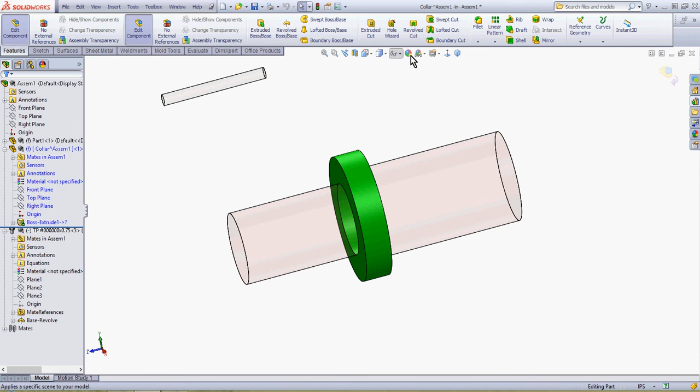I now need to create a new plane in the center of my collar. I'll right click on the collar, choose to edit the part. From the features ribbon bar, I'll choose reference geometry plane, select one face of the collar, choose the mid plane option, and select the opposite face of the collar.

I can now return to the assembly, and mate my new plane to an existing plane within the pin.

I now have my pin locked on center, but need to set its height. I'll add a third and final mate, tangent to the outside of the collar and the top of the pin.

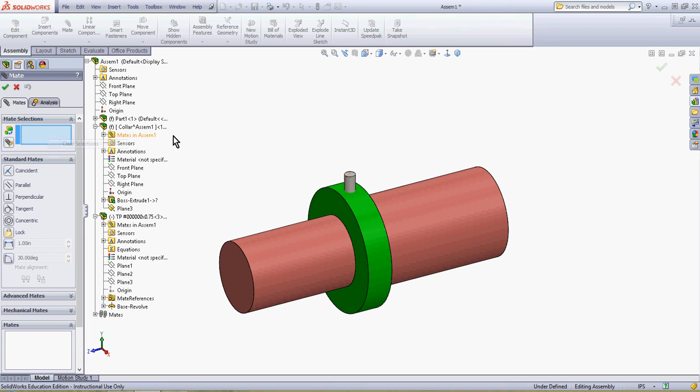My pin is now fully defined within the assembly.

If I look normal to this view, I can once again edit the collar, and in my new plane in the center of the collar, create a revolve cut by converting the edge of the pin.

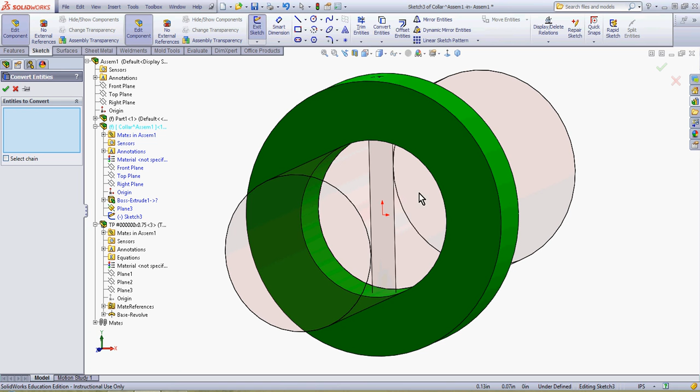I can accept that, and now I can finalize my sketch. I'll drag the length of the pin out and add some geometry.

To fully define my sketch, I'll just add a tangent mate.

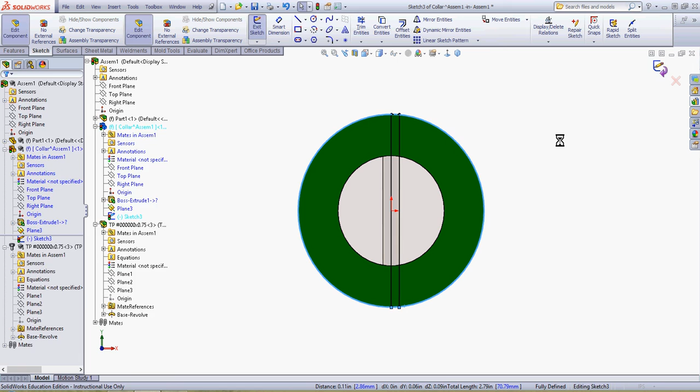Now I have a fully defined sketch, which I can use to make a revolve cut through my collar, and return once again to the assembly.

If I open the collar up, we can see that we've made a cut completely through our part using the pin geometry.

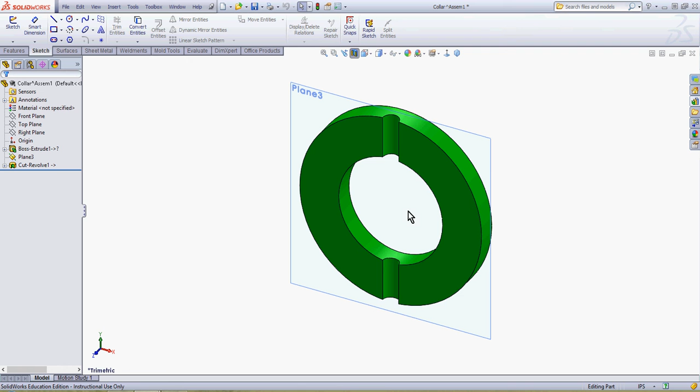I can now do the same thing to the shaft.